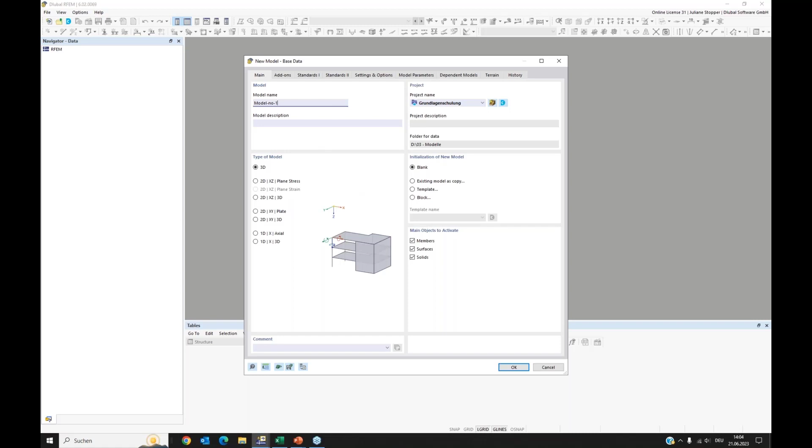We can now start. We will open the program, and here we see RFEM, and I open a new model with this button. Then we come to the base data dialog, and we will enter a name. It's my model number 1. In this register, I don't need to change anything. We can jump to the add-ons register and activate our geotechnical analysis add-on. This we can find here in the area where the special solution add-ons are placed. So I activate it and press OK. Then our model is prepared. The add-on will be integrated into RFEM. So here we go. We have an empty model now, and we can start modeling.

At first we go to the materials, and I will create our materials that we need in this first model. I will use materials from the library. We can open the library via this button, and I will use a sandy gravel as first material. I can apply this. Then I will add a next material. We can have a sand, maybe coarse sand, and we add a third material. We will use a medium plastic clay. This is just an example of materials because we will focus on modeling today.

One more thing. When we have the geotechnical analysis add-on activated, we can select the material type soil. And when we have a material of type soil, we can find here in the material model part the valid soil material models. We currently have the Mohr-Coulomb model, and we have a nonlinear elastic material model. This model is able to represent the stress dependency of the stiffness of the soil, and it also uses different stiffness for first loading or unloading and reloading. And we will have the hardening soil model in the near future.

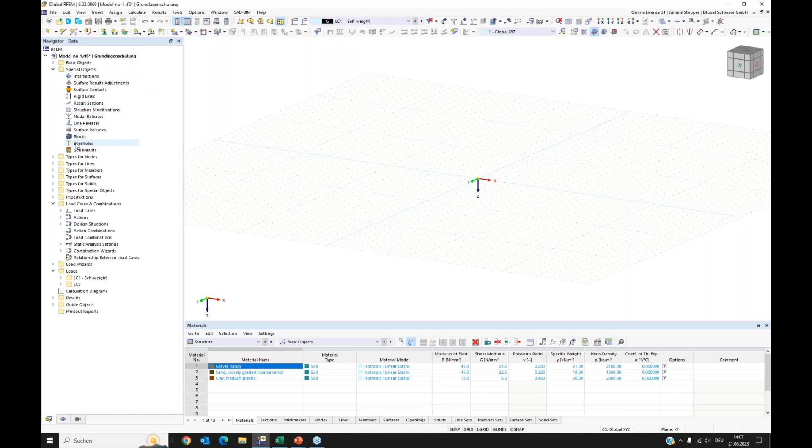We will go directly to the special objects, and here we can see 2 special objects that came with the add-on geotechnical analysis. We have here the boreholes, and we will now use them. Here we see the dialog for entering boreholes. The boreholes provide you an option to directly enter the data you have from your geotechnical report.

For different locations at your field where you will construct your building, you have values along the depth that came from that report, from tests and so on. And this you can enter here. You can enter the location of that borehole. You can enter a groundwater level. We will do this here. We give 4 meters. And here you can assign the soil layers.

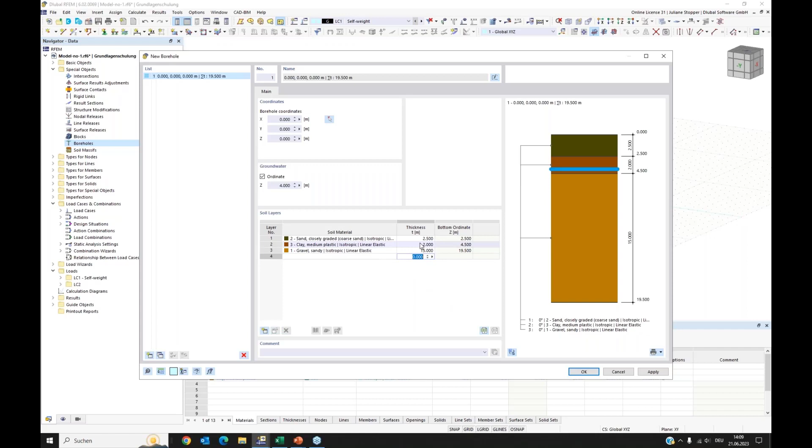We start from the top and go into the depth. In my example, we have the sand at the top, and it's 2.5 meters deep maybe. As the second material, we found clay. It shall be 2 meters, and then we have the gravel, which is 15 meters in my example. Okay, now we have the borehole data given, and we can say okay. Then we see here our first borehole.

I will remove this work plane. I will deactivate it so I don't see it anymore. Here we have the first borehole, and we need some more. We have, of course, more in our field, and I therefore now will use the background layer. We can find it here in the navigator in the guide objects. Here at the bottom you can find the background layers, and I will open the dialog.

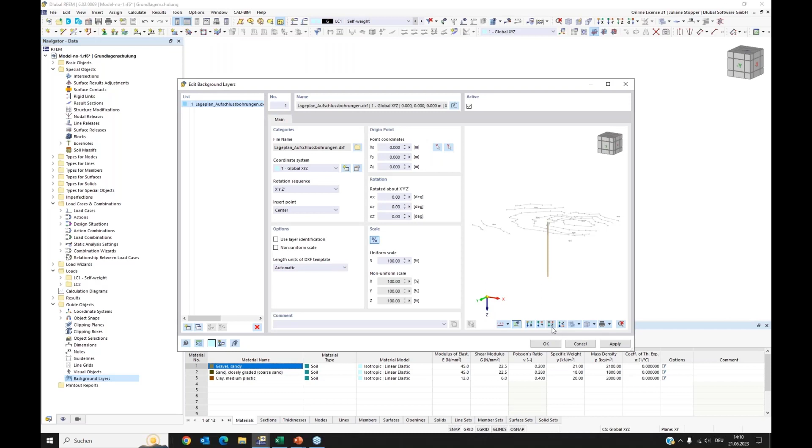As a background layer, we will import a DXF file, and I can do this here. And here I have the plan of my area, and in that plan the locations of the boreholes are given. I see that I have to transform this. You can do this in this dialog, and this is the plan how it is correct.

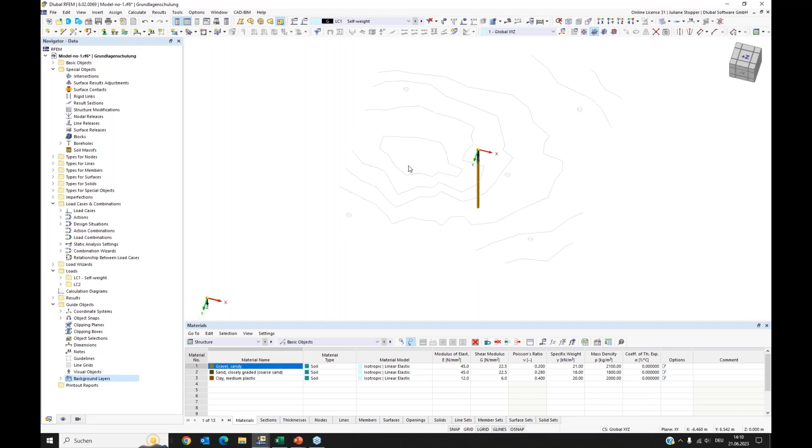And I want to use the option use layer identification. I activate it. And there you can select the layers of your DXF file that shall be used for the background layers. I deactivate the DL nodes. And this is a preview, and I accept this, and this is fine. Okay, now this is, let's say, my map with the positions for my boreholes.

I will modify the object snaps. You can also find them in guide objects. I now only want centers to be picked, and I say OK and set to active. So now I want to place more boreholes via drag and drop at all these locations. Therefore, I create a node at the top just to help me do this.

Okay, now I can select this. I have my borehole and this helping node selected. I press Control and I can move it to the place in my background layer in the graphic. And as you see, the last copy is always selected, so you can directly go on with copying with drag and drop.

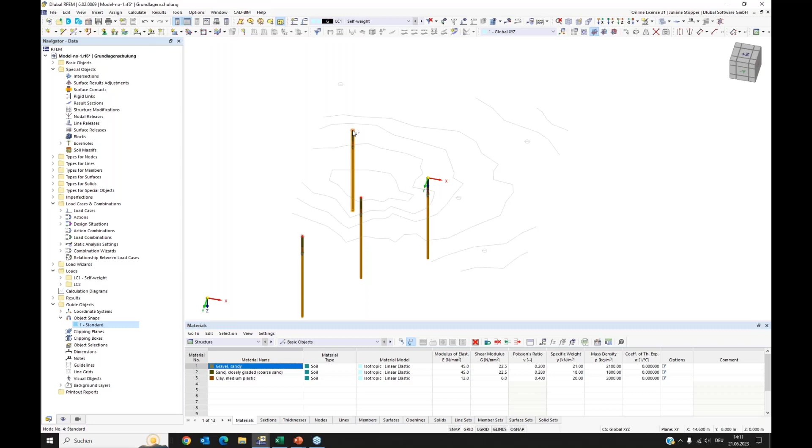Okay, that's it. Now I have my borehole in all the locations. I wanted to delete the initial one because there's none there. Now at all the locations that I got from my project partner with that plan, I have placed these boreholes. I will delete these nodes. I just needed them for the process.

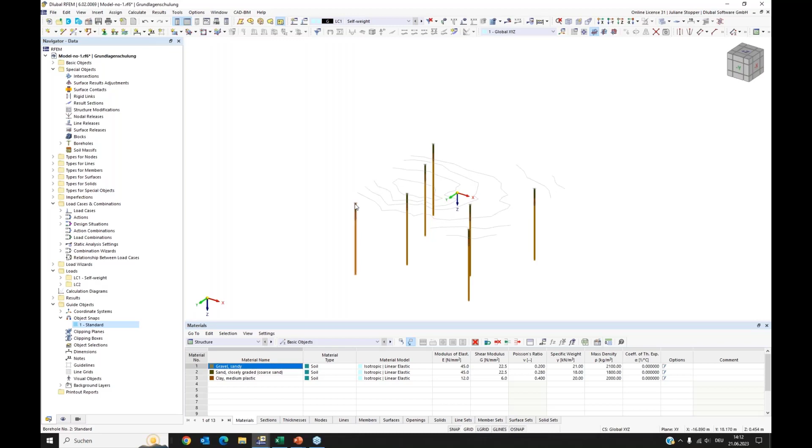And now I have my boreholes prepared. There was no need to measure these dimensions or to fill in data manually. You could just use the drawing. Okay, then I want to use my boreholes. I can use them for creating the soil solid that shall be analyzed. And therefore we have our second special object. You can see here we have the soil massifs, and I open the dialog for this.

With the soil massif, you can generate from boreholes the soil solids that you need for the analysis. Therefore, you can here enter manually the numbers of the boreholes, or you again can select them graphically. There I have them assigned.

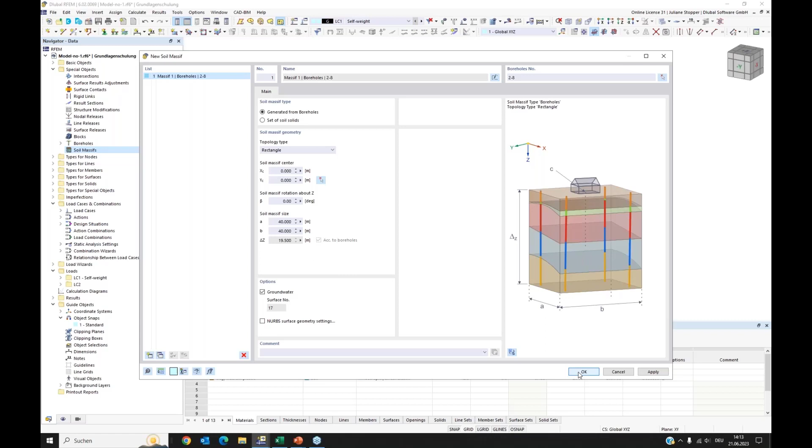Then you need to give geometrical information for the soil massif. You have to enter a center. I keep it with 0, and you have to give the dimensions. I will give it 40 meters along both sides. And we have the option to activate a groundwater level. Okay, we gave all the input that is needed.

And now here we can see our soil massif, our soil solids were generated. I switch on the solid model so we can see it more easily. And we have here in the navigator for display the option to change the display so that the color is dependent on the object property. We can also see here the material and the color that belongs to each material.

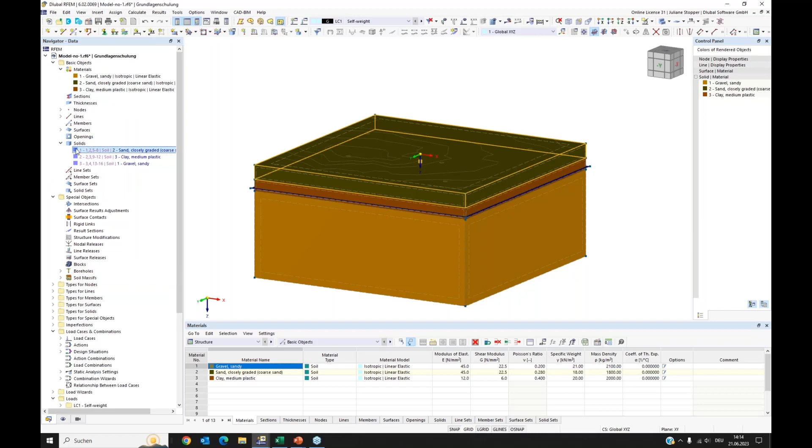Okay, so what came with our soil massif? Our soil massif generated 3 soil solids for us. We can find them here. For each soil layer, 1 solid was generated. And we also have a groundwater level surface generated. And we can find here surface supports generated, this and this.

We can see them also in this window when we go to wireframe model, for example. Here we can see it. At the vertical boundary surfaces, we have sliding support, so only in the local Z direction these surfaces are supported, and we have fixed support at the bottom surface.

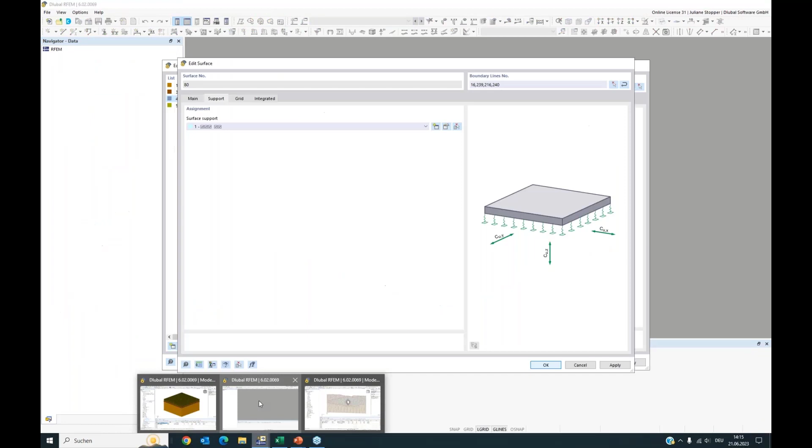Okay, so with this generation, the solid is connected to these boreholes. So if you change data in the borehole, if you change a layer thickness or something, the massif will be automatically updated. Yeah, so that's it. This is what I wanted to show with the first model. We can go to the next example. This one is prepared. Okay, I will save it and we go to another RFEM

for going on with the next topic. In this next topic, we want to use a DXF file again, but we will not use it as background layer. We will directly import it. I go on File and go to the Import button. And here I can import a DXF file. I have to select the file. This is a geological section of the ground, let's say, a drawing. And we will come to an import dialog where we can do last settings before the import.

Yeah, here it is. Here again, I can use this layer identification. And again, I don't need all these nodes. In this case, my model is prepared. I don't need coordinate transformation. So I can say, okay, it can be imported. And this is it.

I have here now the DXF file imported, and now we can see the difference regarding the background layer. Here we have real objects imported. We have lines and we have nodes, and we can work with them. We can edit them, modify them, use them. And this is what we will do. My plan is to extrude this model into the depth, and therefore I need a surface here.

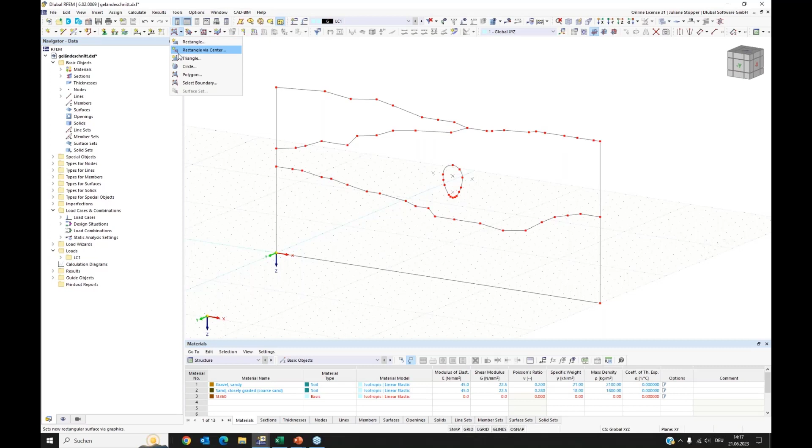We have here this button. Here we can create surfaces, and I use the select boundary option. I need a stiffness type without thickness. It's just a surface for being the boundary surface of a solid. Okay, I have the first one. I select the lines of the second surface, and the third surface is defined.

Okay, then I want an opening here. This is, let's say, the shape of a tunnel here, a small tunnel. And we have here the option to create openings. And again, I use this graphical option where I can select the boundary lines graphically, and my opening is being created. Okay, with escape, I can leave this tool, and my surfaces are ready.

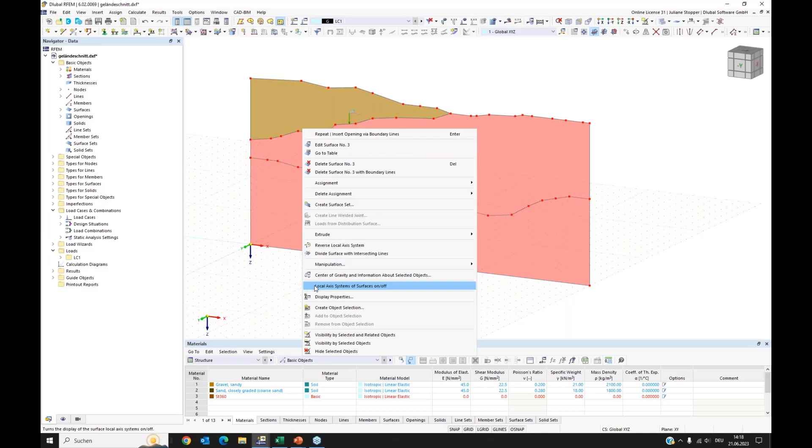Only I want to check the local axes. I can do a right click and switch the local axis system on in the display. Now I see my surfaces' local axes, and I see this one is showing into the other direction. I want to have them the same orientation. So for the surface, I reverse the local axis system. This helps me now for my extrusion.

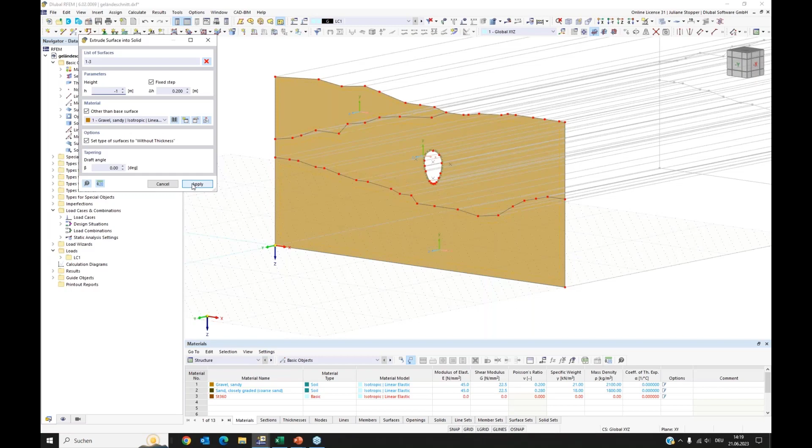I now select all these surfaces, do right click on them and go on surfaces. And here I have the option to extrude, and I extrude surface into solid. Okay, I have here this preview, but I can go here and enter the value I need. I want to have -1 meter for the extrusion. I can apply this, and my model is created. I will switch off the local axis systems.

This is a model that can be used if you have plane strain conditions. Then it's enough if you just cut such a thin layer of your model, and then you can model it.

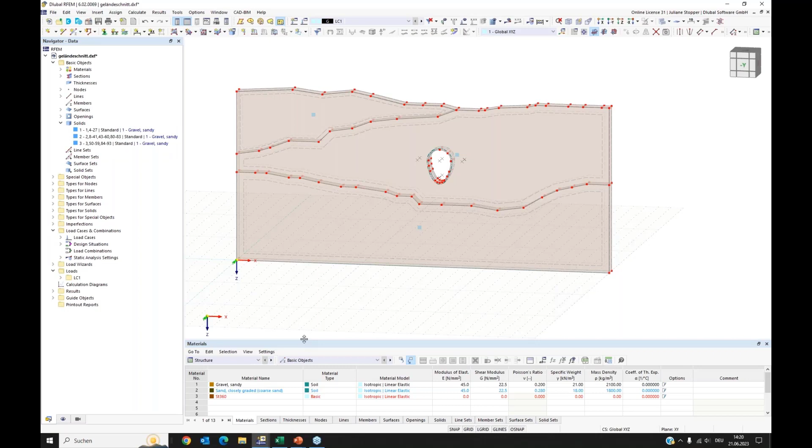It is usable for plane strain conditions. Okay, so now here we have solids. What we need is the material. I have materials prepared for this model. Therefore, I want to use the Excel import. Let's say I will do it like this.

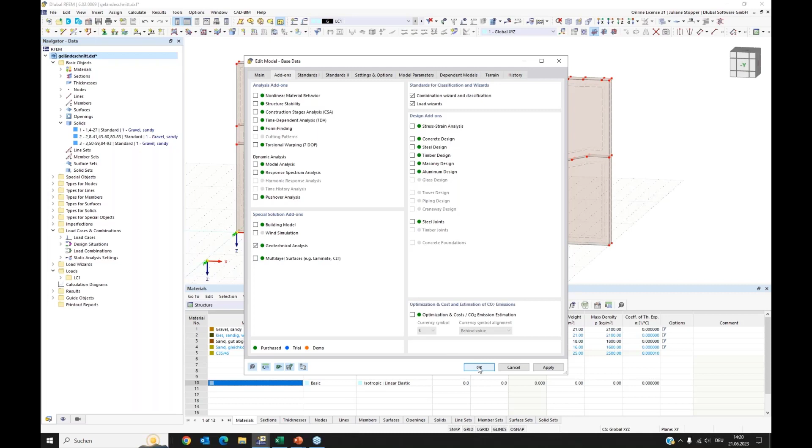I have here my material and I import it. Okay, and now I have materials. I will also go to the base data. As we started with the import, we didn't activate our add-on yet. I will do this. We go to add-ons register, and again here in special solutions add-ons, we have it now activated.

Okay, now I modify my solids. They are all standard and they don't have the right material. So I double click on the center of gravity and I can change the solid type. I choose soil and my first layer can have the gravel. Okay, this one is ready. I go to the next one. Here I have a sand. I will use this one.

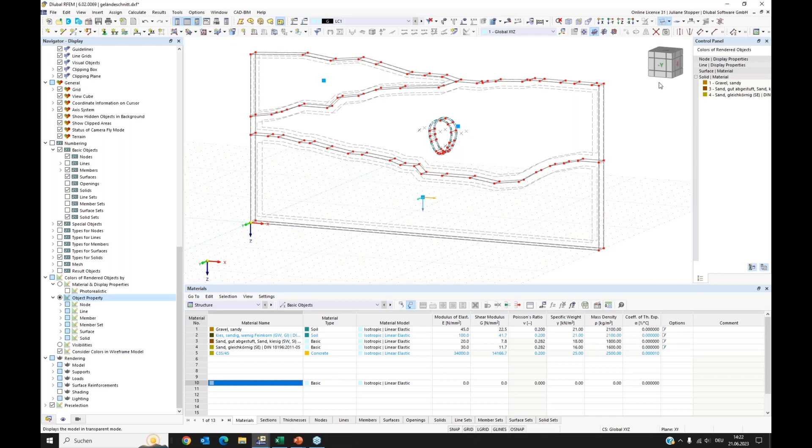And of course it needs to be soil as well. This is needed for having the right material models, the option to use them. Okay, I go to this one and I also set it on soil, and I will go to this material. Okay. Then I go here. I will change the display so that it is dependent on the object property. If we look here now, I can see that I have my 3 materials used.

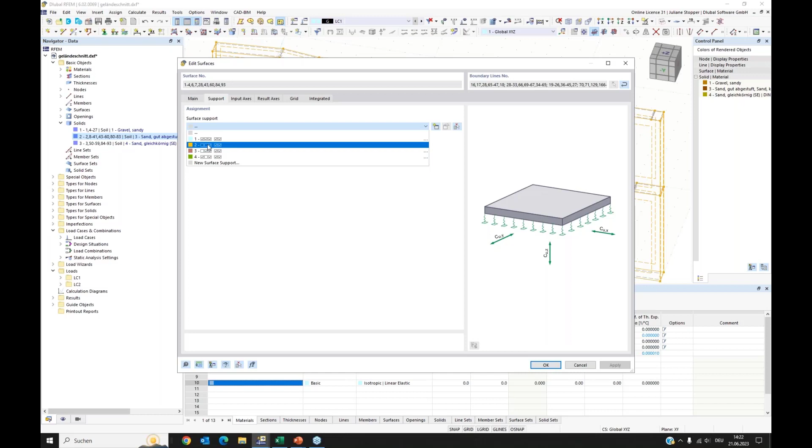Now the geometry is fine, it's finished. What I want to go on with is the boundary conditions. I go to the transparent view and I select my boundary surfaces. With Control pressed, I can select all of them. Okay, and now we can do a right click here and edit my surfaces and go to the options and activate the support for these surfaces. I have here some surface supports that I can use. I will use this one, but we can have a look inside also.

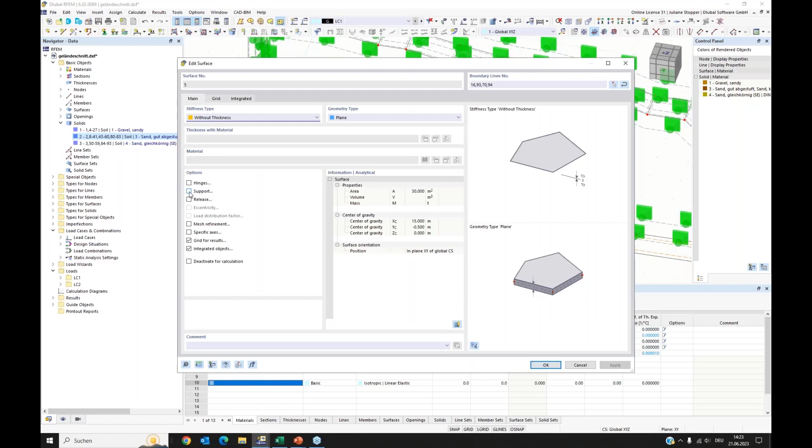Here we can see that the Z direction of the local axis is supported, and we can see it in the display now also. Okay, now with escape I leave these selected surfaces and I select this one, the bottom surface, and this gets a support as well, but the fixed support. Okay, now my model is supported. I switch off the display of these supports in the display navigator. It's easier to have the overview.

Okay, now I want to go to the next step. I want to create the mesh. I'm doing this here. Yeah, and I have a mesh which is relatively coarse for this example. We can find the mesh settings here in calculate and mesh settings. And we have here a general setting for the target length of the finite elements. This is valid for all structure parts.

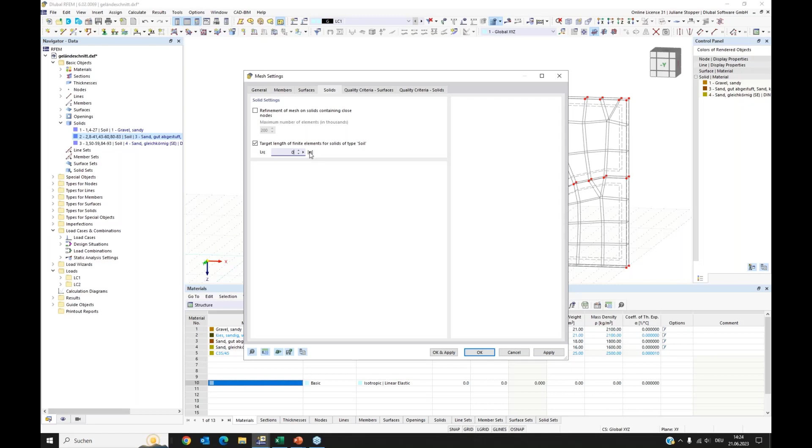And we have an additional setting that you can find here in solids. This is valid only for solids of type soil. So we have an own setting for the target length. Now here for this example, I want to have a finer mesh. I say okay, I don't apply it yet because I want to use another feature for the mesh. I will show you now.

I select the solids and go to the center and say solids, edit, because I go to the options. I want to use a mesh setting, the layered mesh. And I activate it for all the 3 solids. The layered mesh creates the mesh on the surface, and on the other side of the solid, the surface will get the same mesh, and in between there are layers created, and you can here define how many element layers shall be used.

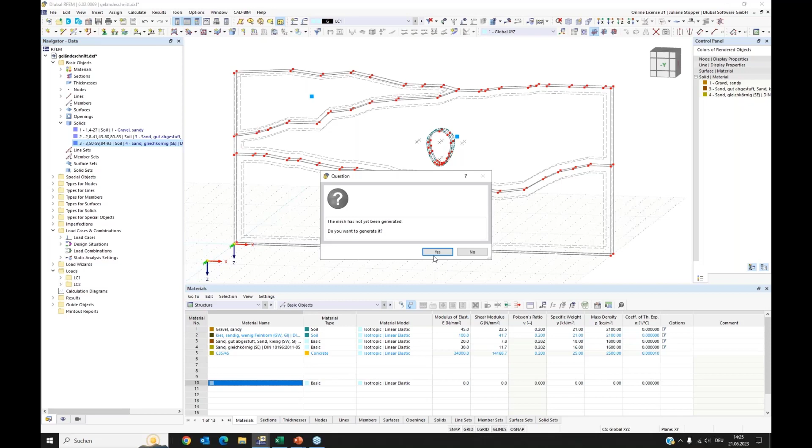For this model with plane strain conditions, one element layer is enough. So I set this on 1 and say OK. Currently, it is needed to go here to the layered mesh. This will be worked over, so you don't need to go there later. Okay, now we have the layered mesh activated, and I will create my mesh. Okay, and I can see a nice mesh.

We will go to the navigator for display. Currently, we see the mesh of the surfaces, of the boundary surfaces. If we want to see the solid mesh, we have to check this button. And here we can see the mesh in the solid. It's quite regular. And we can see we have only one element layer, one element along the depth.

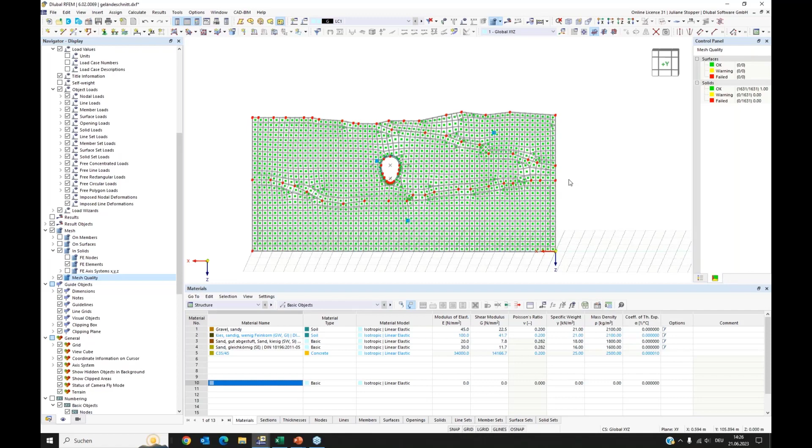One last thing I want to show: you can also activate the mesh quality here, and you have an additional register where you can see the color, and here you get information about the quality of your elements, and you can also see if there's a warning or even a failed element. The criteria for these categories you can find here in calculate and mesh settings, and here we have the register for the criteria.

Okay, that's what I wanted to show with the second model. This is finished. Now we can come to the third model and the last part of the modeling part of the webinar. For the third model, I want to go on with our first model.

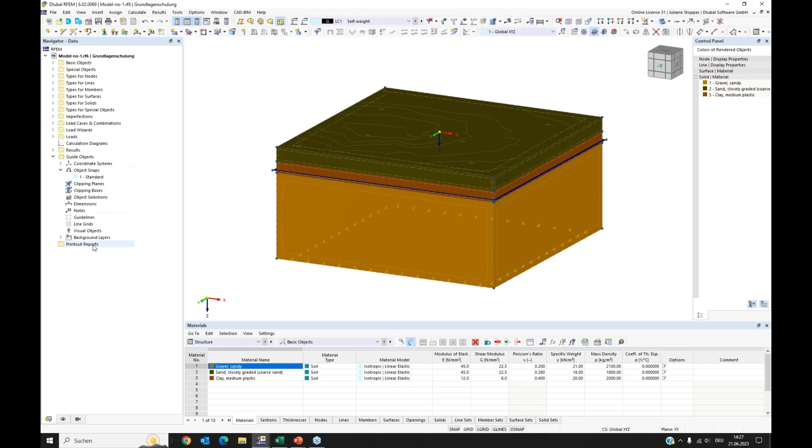For showing the IFC import: here we have our soil solid prepared. What I don't want to see now anymore is this background layer. So therefore, I can go to guide objects. We have here the background layer, and I can deactivate it. So it's there if you need it for graphics or something. You can switch it on again, but now it's not shown.

And here I want to import now a small IFC file of a model. Therefore, we go to import, and we have here IFC, and I'm choosing this IFC file. We will use this. It's a very small thing, but enough for explaining the procedure. This model needs a coordinate system transformation. Therefore, I mirror Y and Z direction, and I say OK.

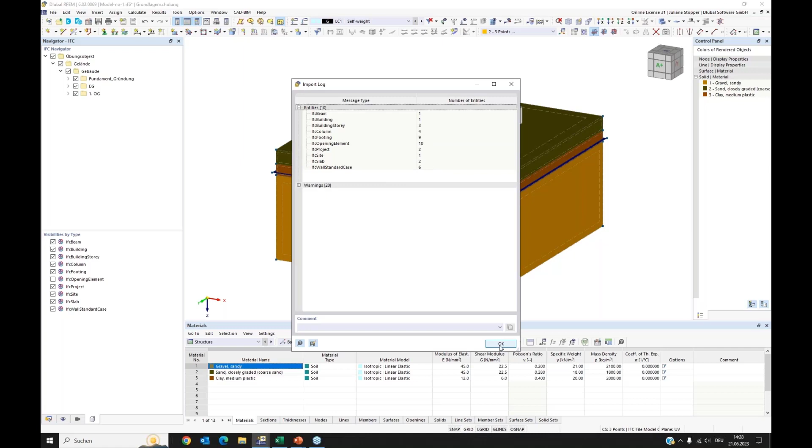Here we have some information about the import. I can see which parts of the IFC model were imported. So you have an option to control whether this is what you expected. Okay, now here we have a kind of IFC viewer, our own IFC viewer. You have here in the navigator an overview about the parts of your IFC model.

The IFC structure is a graphical object. It doesn't consist of objects that you can use for the analysis. So you have to convert them. Because we need a model for the analysis, we have to convert these graphical objects. We want to do this now. One option you have is you can use this graphical information with object snap, and you can model manually the parts of the structure you want to create. The second option is you can convert graphical objects you have here and use them.

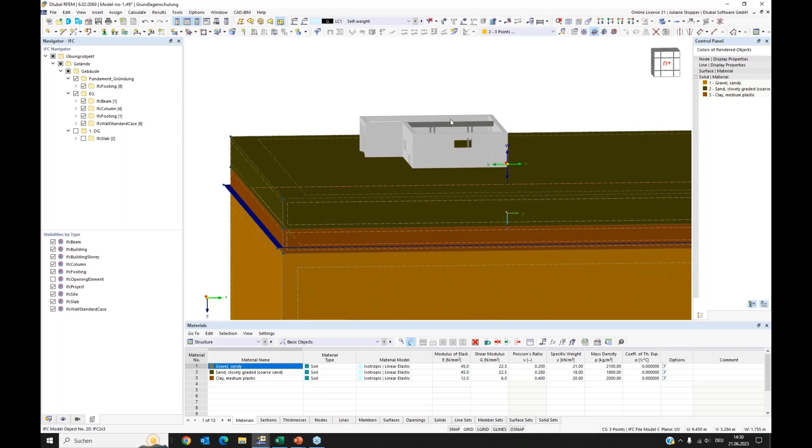I now want to, for example, switch off the slab. Now we can have a look inside of the model, and I want to convert this beam. So I can do a right click here on this beam and say convert into straight member. This beam hasn't got a material yet. That's why it's displayed in red, because we had only soil materials before in this model. So I can see it in the Edit Member section dialog that there's no material.

I can create from here a new one. The dialog opens that we also reached via the main navigator. And here I can add a concrete. I will use this one. Say OK. Then our beam has a material as well.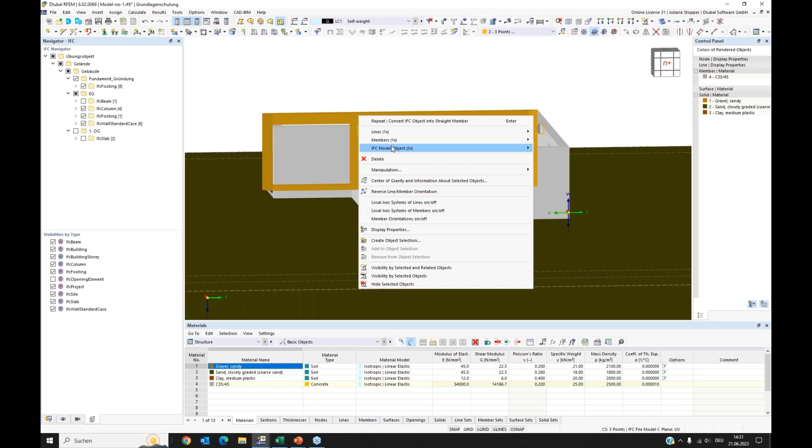OK, you can do it like I did. You can click here and say convert. But you also can do it from here, from the navigator. For example, you can also convert all walls at one time with one click. But I don't want to go into it too deep. I just want to show this example. You have to do some kind of rework. It's not enough to convert it.

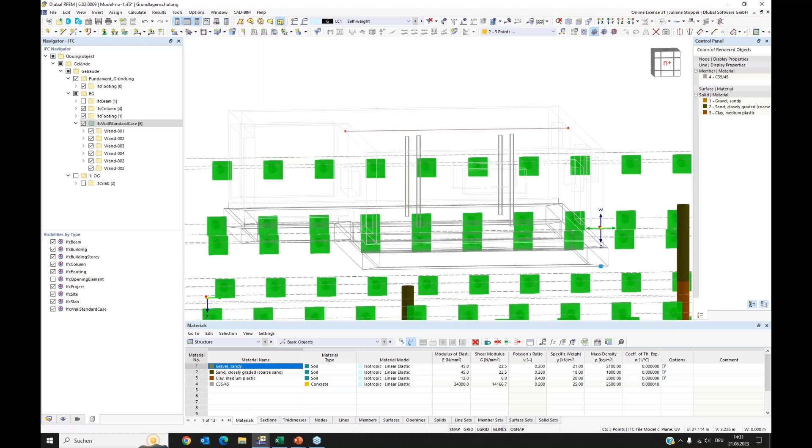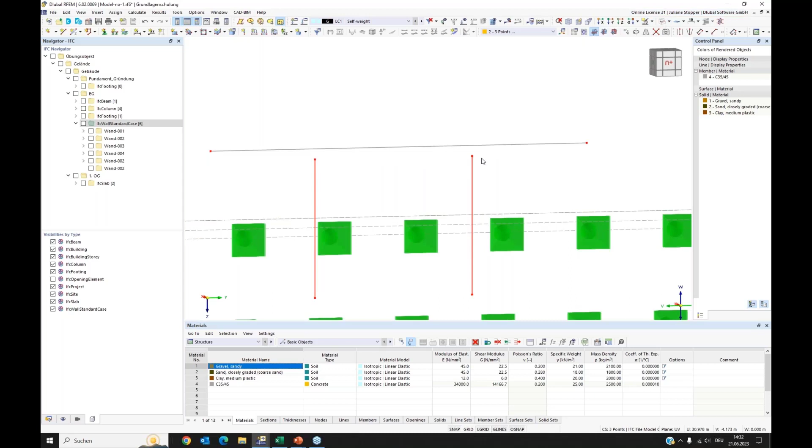I will show here. I will now also convert these columns, convert into straight member. And it can only convert what exists in the drawing, and the drawing had these shapes. And what we now can see, if we look at our RFEM structure, these were now converted. If I switch off the IFC model, I can see these exist in my RFEM model because I converted them to analysis objects, but I can see that they are not connected. So I have to do some rework after I converted all this.

For example, in this case, we can extend them up to the next member, and then they are connected. So some work needs to be done to have the full analysis model. We have our own webinars for this, for different interfaces for the import of IFC files or SAF files. You can find several webinars that go into deeper explanations for this.

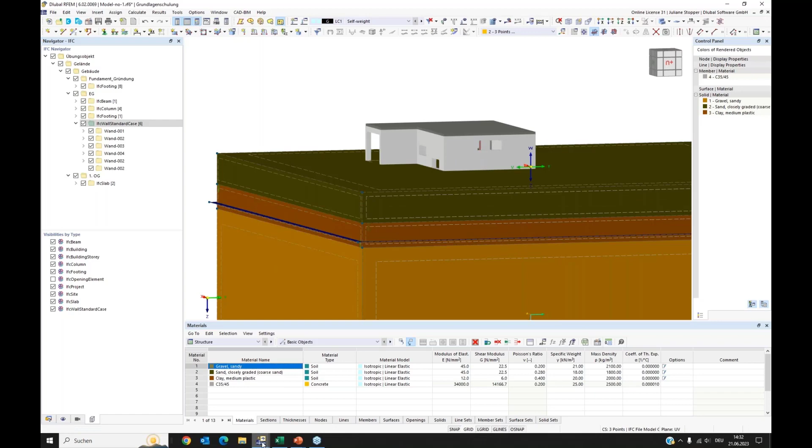I will now stop this here. I just wanted to show this option. We will go to a next model where this conversion is done. I will go here. I have it here prepared.

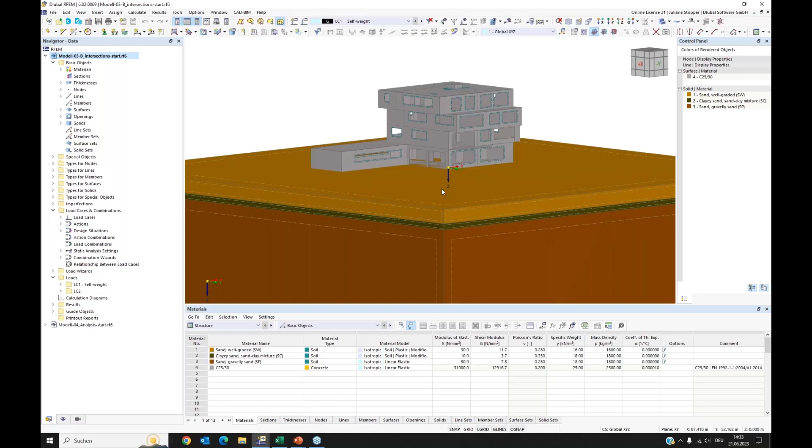In this model, I had a building that was imported via the SAF interface, and it is prepared now for the analysis in RFEM. However you reach this model, you can use IFC import, SAF import, or other ways, or directly model it. If you have finished your building, you can use it to modify the solid so that they are connected.

If you have a building with a foundation slab that ends on the top surface of the soil massif, it will be automatically integrated. But here we have a building with a basement floor in deeper zones of the soil massif, and it is not yet integrated. The building and the massif don't know each other - they don't share nodes, and they wouldn't share stiffness, so the building is not supported yet.

That's what we have to do. We have to model it so that it is integrated, and I want to do it with intersections - using a solid intersection to cut my surrounding solid, my soil massif. This is what we are going to do.

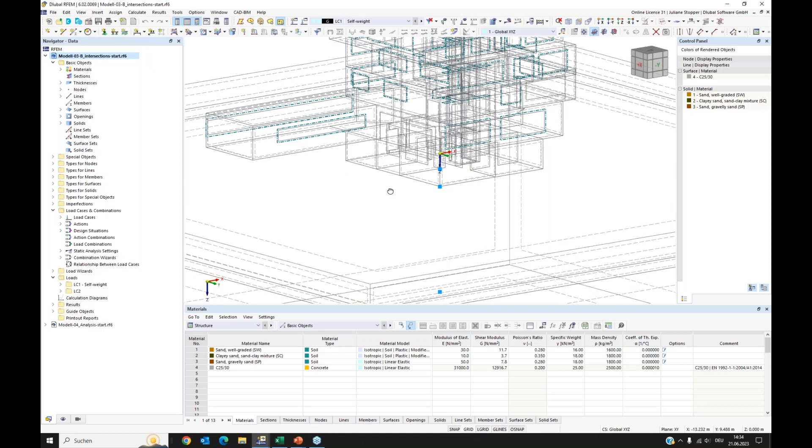I will here in the basement floor create a solid kind of helper object. Later I won't need it, but I will now use it for modeling the hole. Here we have extrude, and I say surface into solid again, and we need it to be minus 2.98 meters. I can say apply, and now I have my solid here.

I can also see this - I have soil solids, and here's a fourth solid created. This solid I will now edit and change the type of solid to intersection.

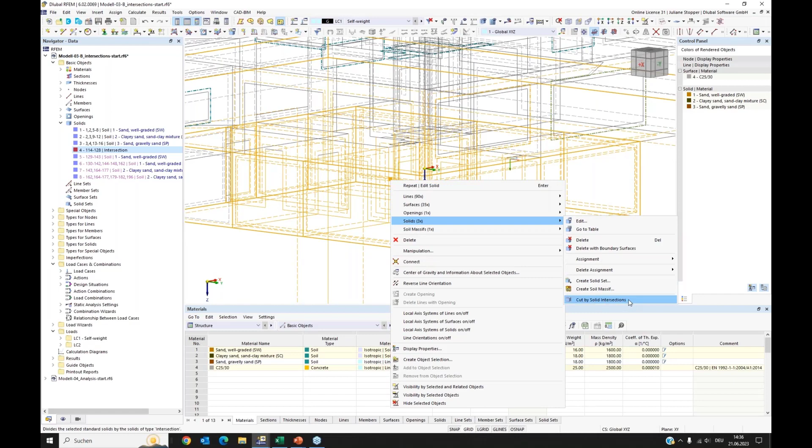With this solid type, I have the option to use Boolean operations, and I say yes. Then I can select them, go on the model and say solids, and here we have the option to cut by solid intersection. This is what we do.

Then you can see that we have here now one solid at the bottom, and we have the upper layers, and they now have the opening. We also have in the building now the parts that were cut from the previous soil structure. Yeah, we can also have a look at this - here we can see that an opening is created.

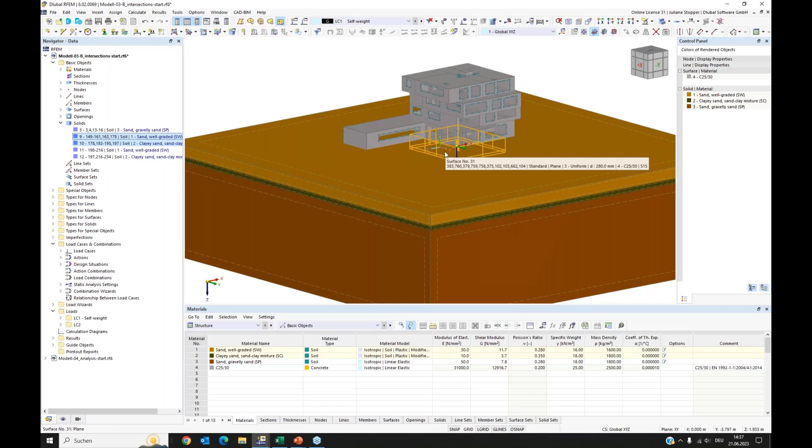We now will delete these soil solids that are placed in the basement floor. In further analysis, when you use construction stages, you can keep them and use them - you can calculate your initial state with all the soil solids, and in the next stage remove these solids to model the excavation and deactivate them. Here now, just for showing it, I remove them.

Okay, so now I have only surrounding soil and my building inside. We can again have a look at this, and yeah, now they are connected. They share these boundary surfaces, and the mesh should be good.

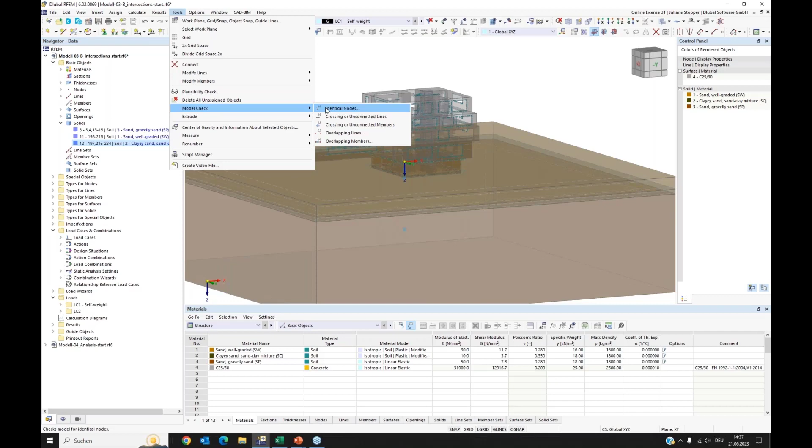I want to show you also the tools we have - model check tools. I want to use it because this model was imported, it was overworked, and now we used the Boolean operation. So here some identical nodes were detected in my model, and I can use this selection to kind of repair it, to unite nodes or delete unused nodes. I agree, and now these nodes are gone.

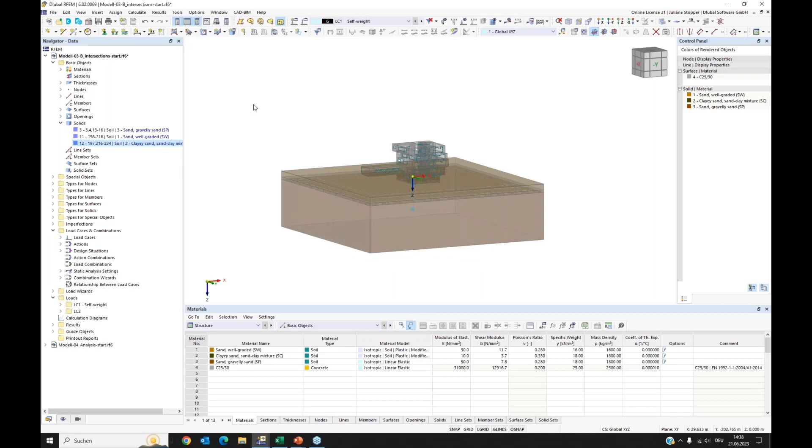Then I want to use the overlapping lines check, and I see I have some overlapping lines. For those, I will use this button. Okay, so if we look now, it is fine. Okay, then I want to do a last thing with this model.

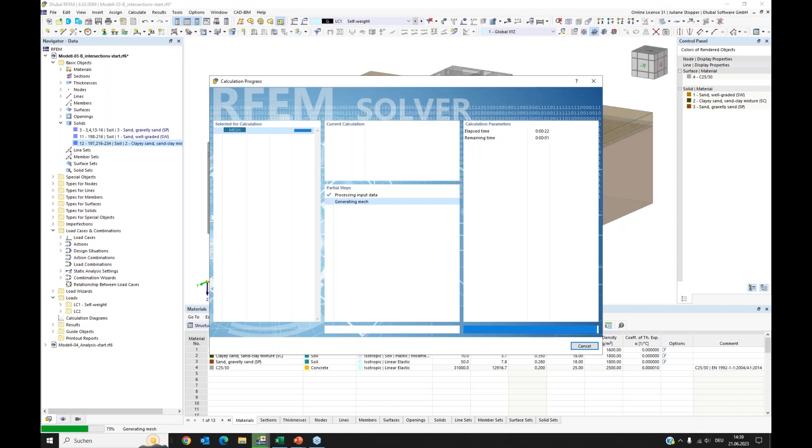I want to create the mesh. It's a bit more slow because of the presentation. With GoToWebinar, generally it wouldn't be that slow. Okay.

Yeah, and here we can see our mesh, and we can also now see that it makes sense that we have different mesh settings for the soil solid and the superstructure. Yeah, that's it. Okay, I came to the end with the modeling part of this presentation.

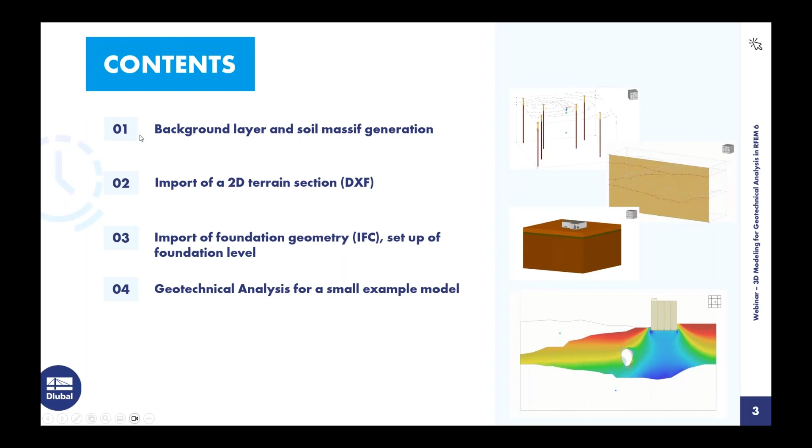I will go back to the slides. We finished the first 3 steps, and I will show kind of a summary slide. Here we have the modeling procedures that we went through listed, and some additional. We have several interfaces in RFEM 6, and you can find further information about it on our website.

We have web service and API where you can create applications for procedures you have to do again and again. We have integration with Autodesk Revit. We have interfaces to Rhino Grasshopper. We have an SAF interface. We have an Autodesk interface.

The DXF file that I imported, I could have also directly imported from AutoCAD - this is another option. We have Microsoft Excel export and import. We have DXF import export, interface for IFC, and the background layers we saw. Then of course you can directly create the geometry and use all the tools we have in RFEM 6 for model creation. And then in our add-on Geotechnical Analysis we have special objects like boreholes and soil massifs that support you with creating the model.

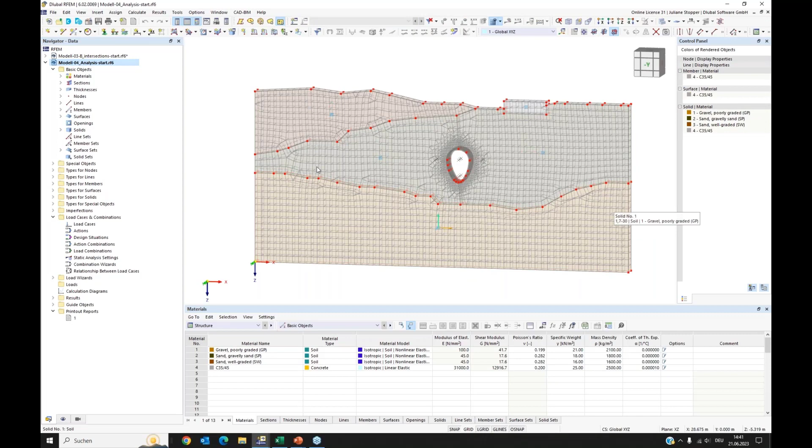Okay, that's it regarding the model part. Now we come to our fourth example. Now we will analyze a model, so I open model 4, and we will have the model in plane strain condition. So I have taken this geometry again.

I prepared it a bit. We have here this existing structure, this small tunnel, and I assigned concrete as material to it. And we have here, let's say, a kind of new structure that shall be erected. What we want to analyze now is which stresses and strains happen in the soil, and which kind of load, which inner forces will arrive here at the surface of the small tunnel. Okay, for this I prepared the geometry.

Let's go to the materials. I have now the nonlinear elastic soil material used. You can find more information in the online manual regarding the soil materials, and in the last webinar I spoke about this material model.

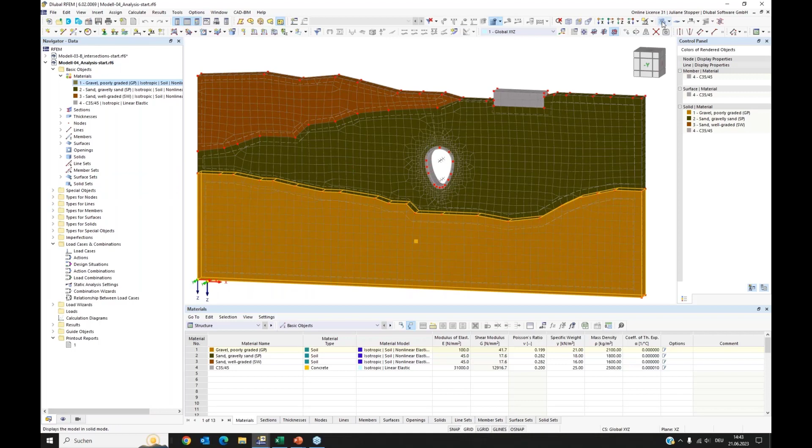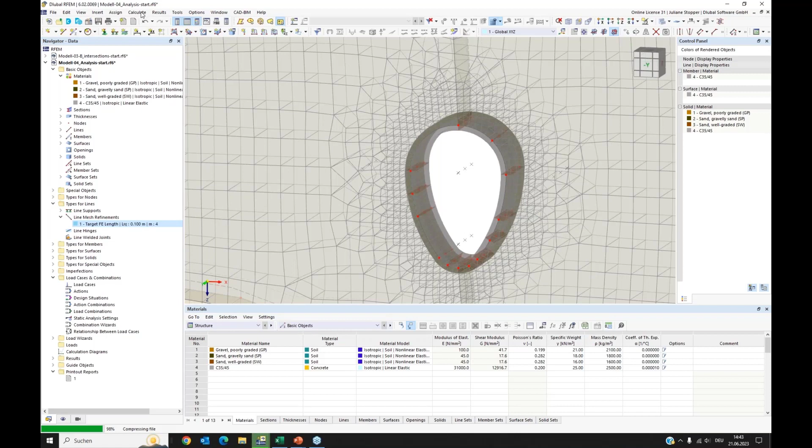Then I have mesh refinement used, we can see here. You can find the refinements in the types. I used a line mesh refinement, and when we have a look inside, here's the assigned lines. We can remove it, I only wanted to assign these lines because it's something nice. The layered mesh automatically extrudes it into the depth, so it's not needed in the next step to again assign the lines. With this one line it's done.

Then all of the topology is prepared. We can go to the loads and open the load cases and combinations. I click here on new load case. I deleted here all previous settings, so we start from scratch.

We will define a first load case: the self weight of soil. Therefore we have an own action category that comes with the add-on Geotechnical Analysis, it's the permanent soil action category. With this action category, it's possible to activate self-weight only for soil solids. We need this because in the geotechnical analysis, you need this self-weight of soil load case always as initial state, at least.

Okay, then we create a next load case. I have no static analysis settings given yet, I have to do this. So I create a new setting, I will take the default option, only I will use 4 load increments because we have the nonlinear material model used. Okay, I apply this and create a new load case.

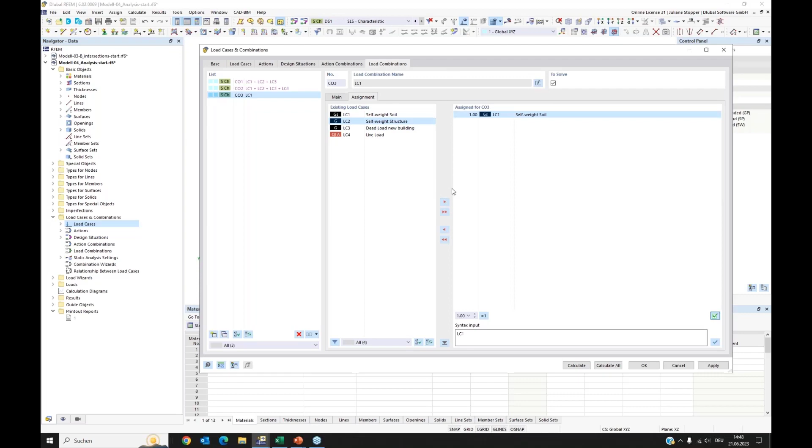Okay, I need another combination. I use the generator, but I can add also manually defined combinations. I want to create my initial state. In my initial state, the self-weight of soil shall be active, and I also want to have the self-weight of my existing building to be active. So I want to calculate the state of my environment or my soil and this structure before this building is erected. So I have self-weight of soil and self-weight of this structure.

I need to do something so that this structure is not considered in the self-weight, because this load case would consider all structure self-weight. Therefore, I have here in the options the structure modification that I can use. I activated it, and we can go into this. And we have here the structure modification. I will give it another name.

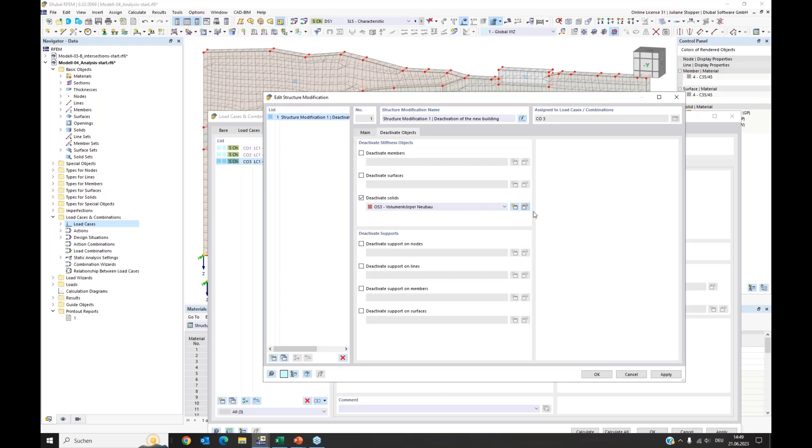It's deactivation of the new building. You have here the option that I used: deactivate objects. In this window, you can select the objects that shall be deactivated. We have solids that shall be deactivated, and here only one solid is selected. We can control this - if I look here, I can see yes, my new building is selected. This is fine, I can agree all this.

And I have my structure modification active. So in this load case and in this load combination 3, my new building will not yet be considered, which is fine because I want to have here the initial state calculated. I also create a copy of this load case. I now want to have the following situation for my initial state: I need to know the stresses of this soil, because the soil material reacts stress dependent.

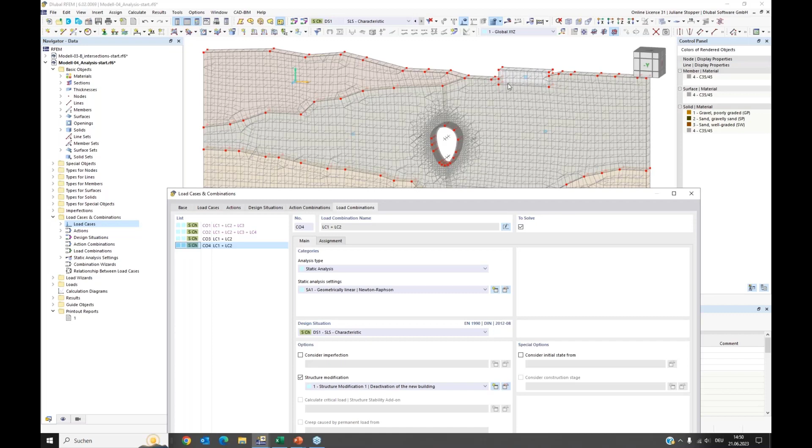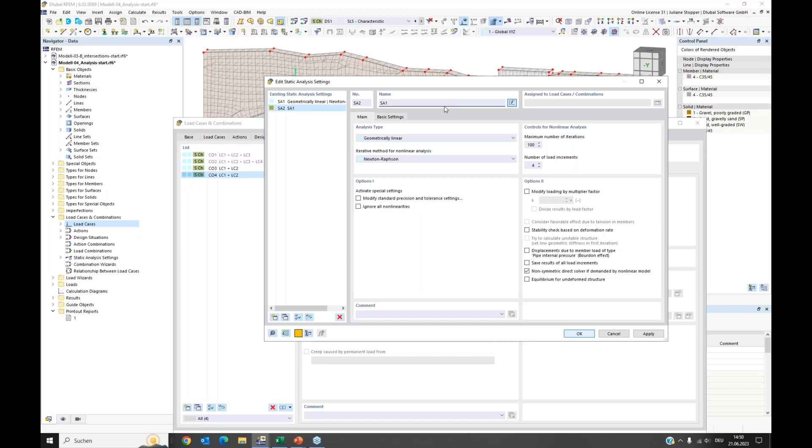So I need to know which stresses are there for using the right stiffness for further loading. What I don't want to know is the displacement - I want it to be reset to 0. When my building is started, I want the displacements to start to be considered. Therefore, we have a special static analysis setting. We can again go here, and I will create a copy of this and rename it. It's actually the same as SA1, only it is for undeformed structure.

And the setting you can find here in options 2. We have here the option equilibrium for undeformed structure. So when you use this setting, the equations that will be solved, the model will be solved, the stresses will be calculated, but the deformation will be reset to 0. Okay, this is what we want, and for this combination 4, I will use it.

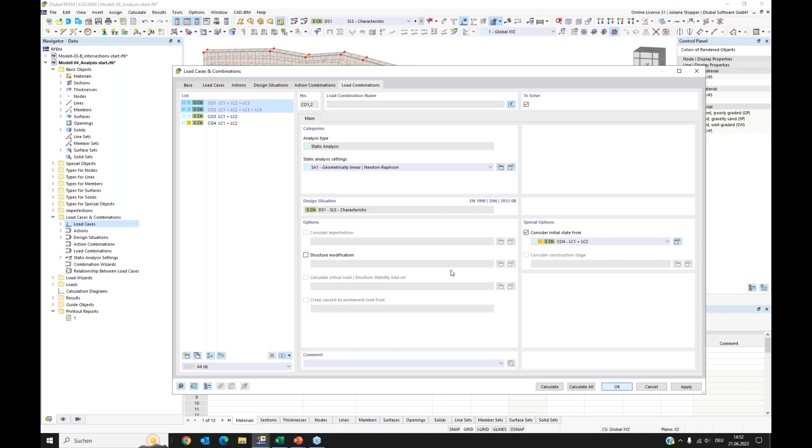I want this initial state with 0 deformations, but with the stress state to be considered in my combinations 1 and 2. So I select these 2 combinations, and here in special options, you can consider the initial state, and I select this one. So my loading in these combinations starts with the stresses of this model, and the deformations are kept as 0. Okay, so now we have this prepared.

What we need is loads. We created load cases, but we have to give also loads. I will use this button here and define a dead load for the new building, and I say OK. The dialog opens, I can select the surface. This surface will be used, and I will assign 100 kilonewton per meter square. Now what I wanted to show is that you actually can stay in this dialog and press apply and next, then it would be open, but okay, I closed it.

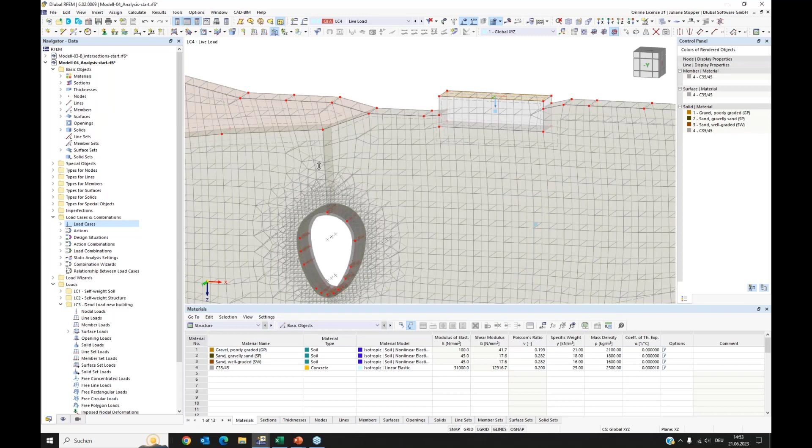So we now can use live load. I will again assign the surface, and you can use 125 kilonewton per meter square. Okay, we can control this graphically. We have the live load and the dead load, and if we look in the combination, we have both of them. Okay, that's it. I can also give some more color.

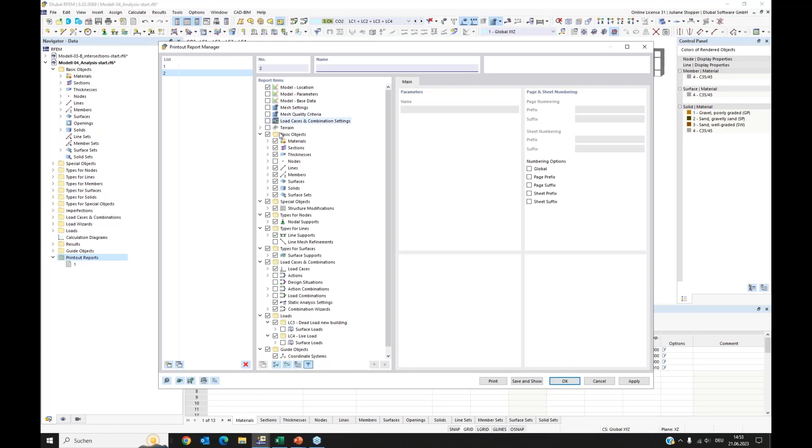I have something prepared for this model. I prepared a printout report for us. This can be found in the navigator at the bottom. Here you can do a right click and create a new printout report. You come to printout report manager. Here you can select the topics you want to have in your report. I cancel this as I have already prepared it.

I would like to shortly show - I prepared it so that I can print graphics now during the analysis process. Yeah, we will do this. Where is it? Okay, this is the first version of my report, and we have something good.

You can change the language. We can here in edit set the language. We want English language. So this is a nice feature - you can work in your mother language, and when you work for other countries and you have to give another language, you can change this. Okay, I will close it, and we will now from time to time print into it.

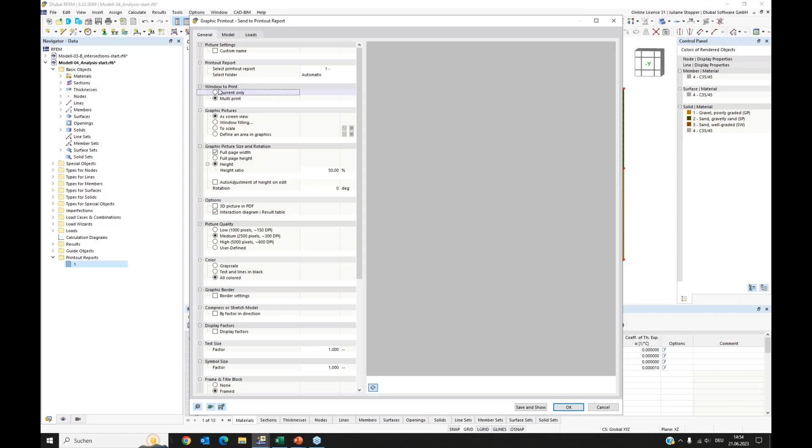So I want to also print this loading situation. So we can go here on File, Print Graphics to Printout Report, and you get a preview. And I want to only print the current window. And here we see a preview, and it looks fine to me. I say OK. Then it is saved in the report, but it will not be shown, and I can go on working. I can have a look later.

Okay, now everything is prepared and we can start the analysis. We can go here to calculate and say to calculate. And now I would like to at first show this one.

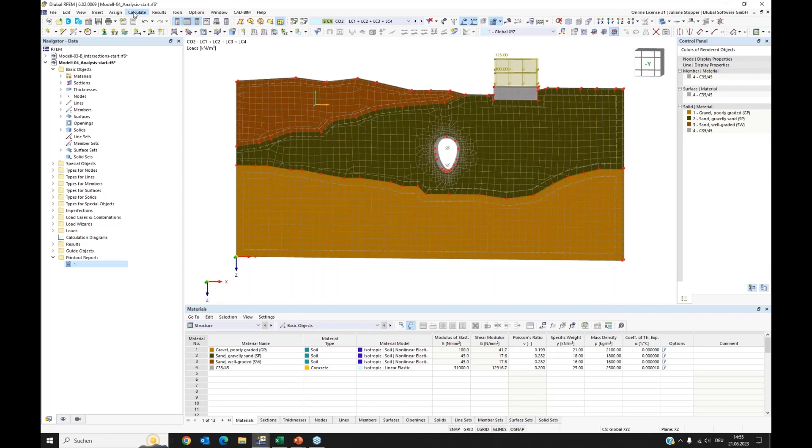Now this initial state is calculated. I want to also calculate the rest. We also could have selected this before. I will select the design situation, characteristic, and then all the contained combinations will be solved. So I select this and say OK.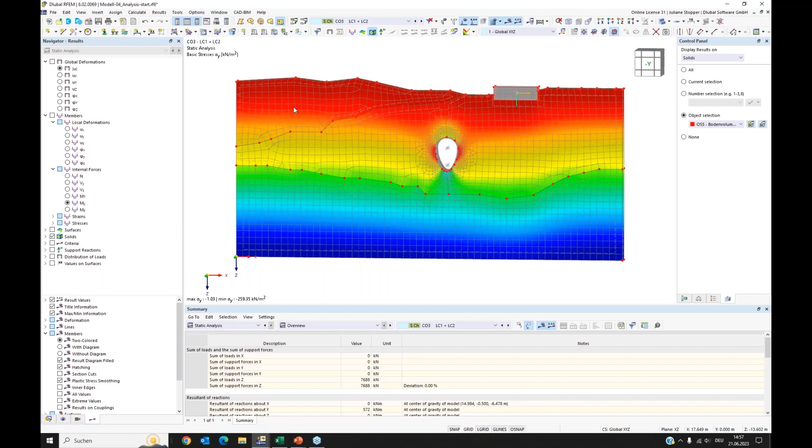I can here in the control panel select what shall be displayed, and I want to have the object selection. I prepared an object selection that only contains soil solids. Okay, but first of all, I want to go to the initial state. So what we have here is the initial state. It's the self-weight of soil and self-weight of this structure. This we deactivated. We have a deformation here.

And we have, of course, stresses. And this is what I said. I also deactivate the mesh. This deformation we don't want to see in our results. That's why we reset it to 0, because when I start my construction of this building, for me there's 0 displacement at the beginning of this load case, let's say, or load combination.

So that's why we have this copy where we said reset displacement shall be used, and we can see it worked well. The displacements are 0. But if we have a look at the stresses, we will see that we have stresses. And we can also compare it with the previous combination, and we see it's the same.

So this is the initial state stress, the geostatical stress, and you can also control it. You can check it with hand calculation. You can calculate with the specific weight and the heights of these layers. You can compare it, and you will see it's plausible. I did it, and it's good.

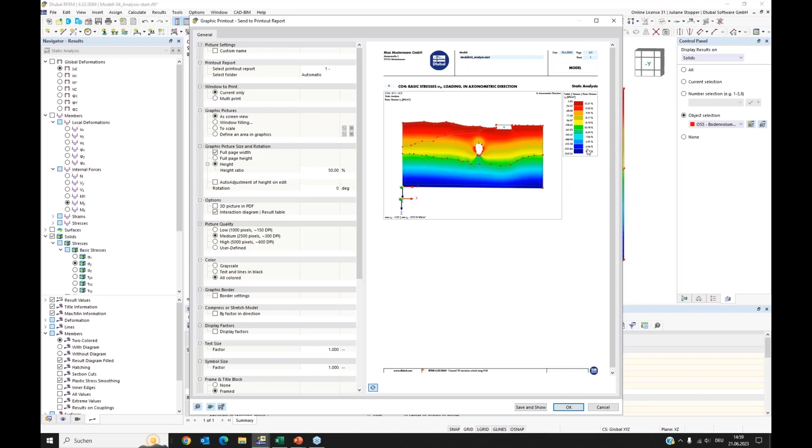Okay, then we can print the graphic. So we have a graphic of the initial state in the report, and yeah, I like it, so I say okay. And then we can go to the next load combination, and I will go to the leading one with the highest loads.

This is this one. So at first we can look at the deformations, and here we can see how, with this helping structure, let's say, it deforms, and how the deformations go to the deeper soil layers, and we have here the deformations. Okay, but now we want to have a look at the stresses.

We can here select solid stresses, and what we have here is the final state of this combination. So we have stresses of the self-weight, of the soil, of this structure, and also of the new building. We have the option to select another type of result.

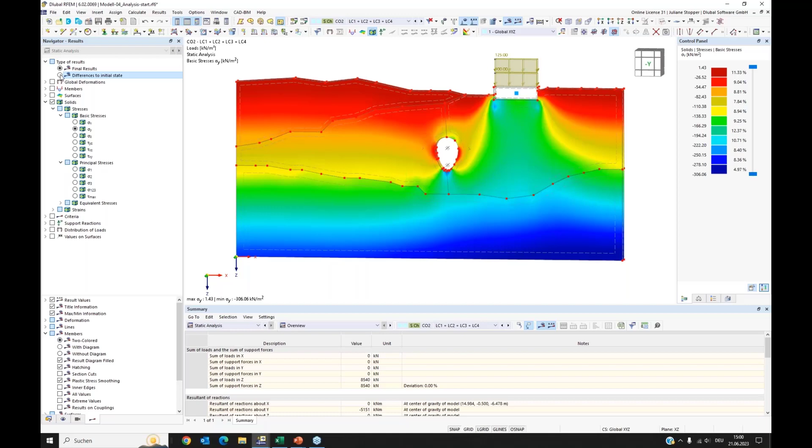You have the option to just see the stress that came through the delta load between the initial state and this combination. So what came after the initial state is only this load, and if you activate this button here, you will see the load that came in addition to the initial state. And we can see now the stresses that are caused only by the new building.

And here we can see very well how it goes into the soil, into the deeper zones, and that here some stresses reach our shell of the tunnel. Yeah. I want to also print this one to the report. And we have again our preview, and it's fine. So again we can say OK. And I want to also see the final results and print it to the report.

OK. As a last step, I want to show that we can also have a look now at our tunnel, at our construction. We want to know what comes there. And I have created a result beam. If we see here, I put a line in the center of these surfaces of the tunnel shell, and there in the middle I placed a result beam that integrates stresses and forces of these surfaces that I assigned, so the surface of the tunnel.

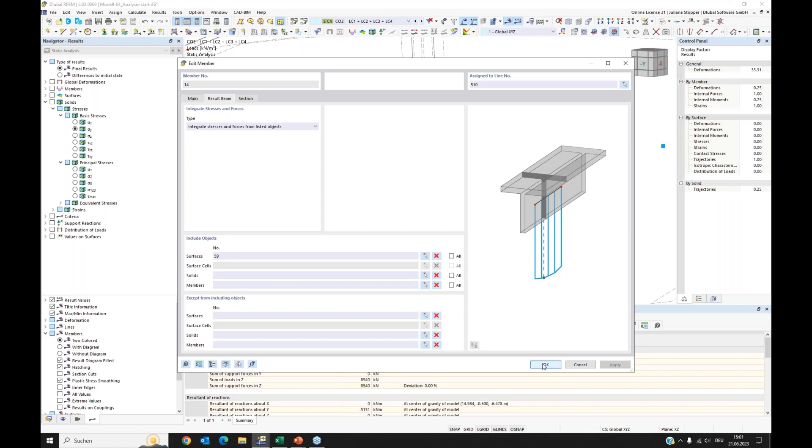That's why I can use now member results, and I can see what reaches my tunnel due to this load combination. Again, I could also select the differences to initial state. So this is, for example, the moment that came only from the construction of this new building, and I also can look at the final results. So in total, I have this moment.

Now I can also check other internal forces. I can check displacements and so on. Yeah.

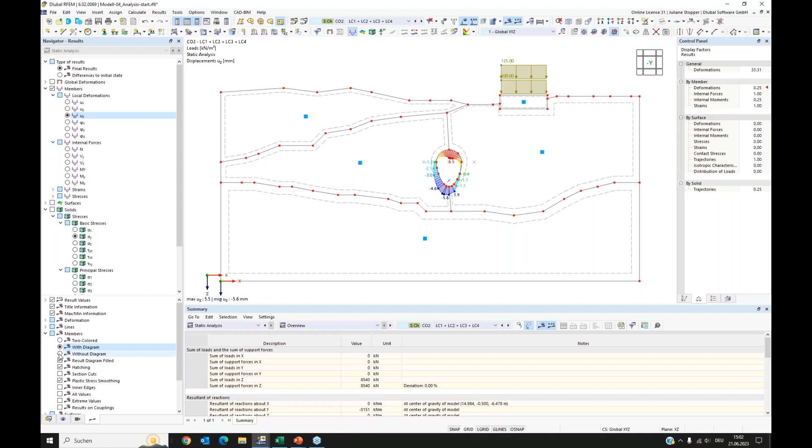What we can do also is we can here select for members, as we have the result beam. We can also select a colored shape, and then we can print this as well to the printout report. And I want to use the multi-print because I want to have the same view, the same perspective.

I will use this load case, this load combination, and here you can select what kind of forces you want to print. And I want to print the normal force, the My, and the displacements. Okay, I say okay. Yeah, this is it. I came to the end with that model. This is what I wanted to show you in this short analysis.

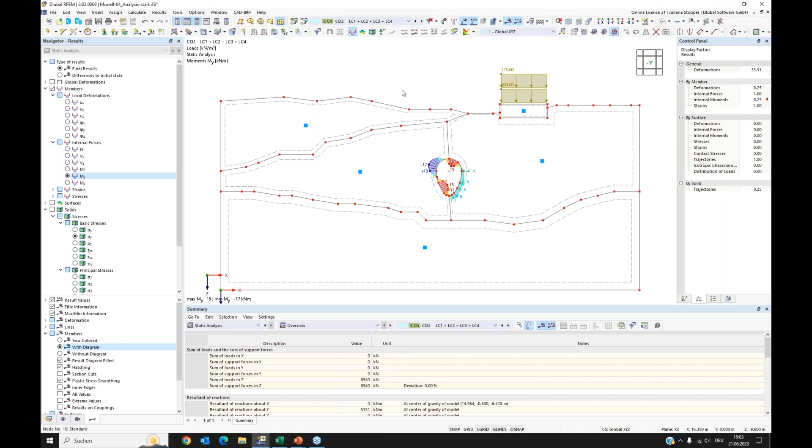This is the first step of the analysis of this situation. This is for first information about the stresses, strains, and displacements that are to be expected. In a further deeper analysis, the construction stages could be used, and the phases of the situation could be modeled more in detail.

Then you would model only the soil, then you could remove the soil in the next phase, construct the tunnel shell in the next phase, do the excavation here, and so on. This you could model with construction stages. Okay, but for today's webinar, this is what I wanted to show you. As a final step, I would like to have a look into our printout report.

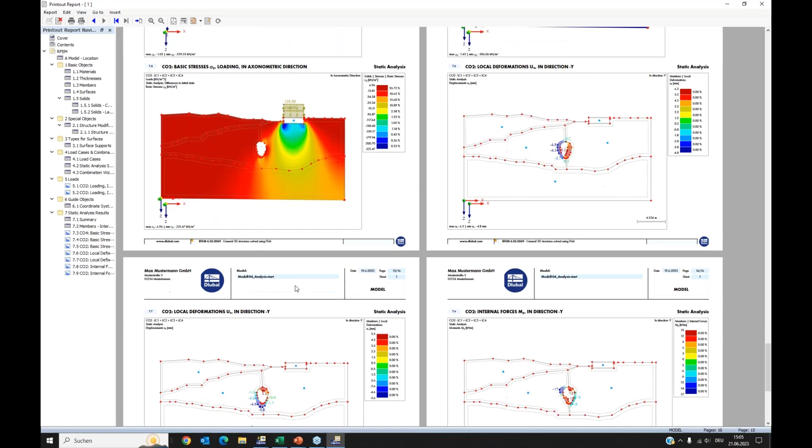Yeah, and here we now have our report, and we have all the graphics that we printed besides. We have here an overview about the situation. We have our multi-print here. You can easily modify your report. You can, for example, click here and say start with a new page. Then we have our tunnel information here.

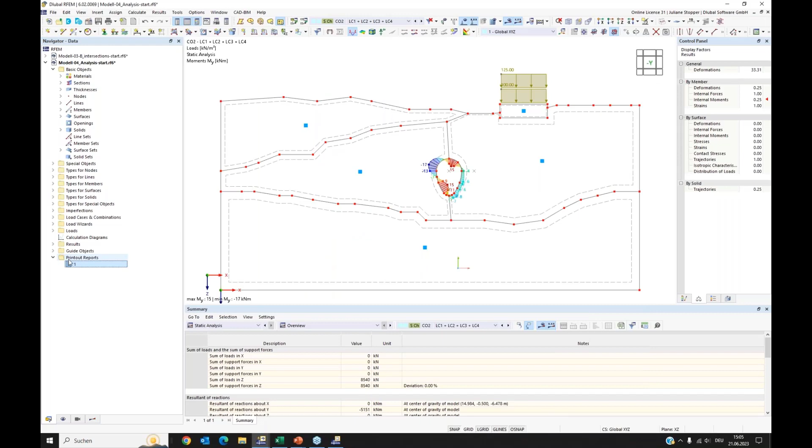And one last hint, in the material, you can do a right click and say edit. And we have here the option to activate our soil material, so that we get information about it. So it will be shown here also the values you gave for cohesion, for E modulus, and so on. Yeah, maybe I should have pressed this button. Save and show. Then it should come.

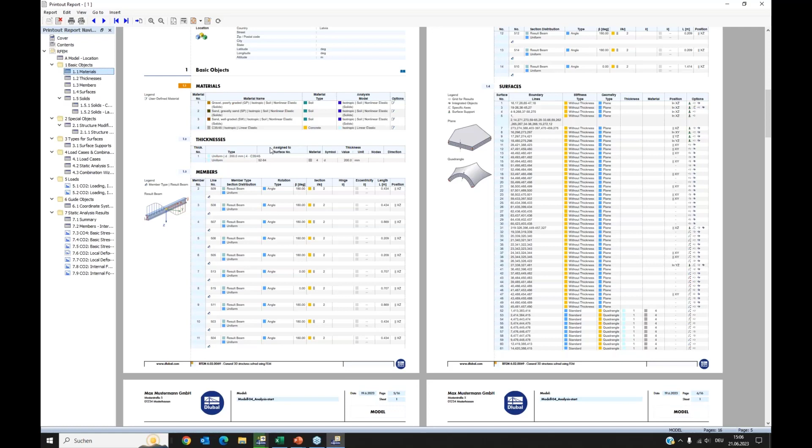Yeah, this also is maybe a bit more slow because of the presentation with GoToWebinar. It's generally not that slow. Yeah, here, this is what I wanted to show. You have the option to activate this detailed information about the nonlinear elastic or the soil materials information.

Okay, yeah, that's it from my side. This is what I wanted to show with this webinar. I hope it gave a good introduction of modeling techniques, of import options, that you can use if you have some files, some data from project partners, to make your modeling procedure more easy.